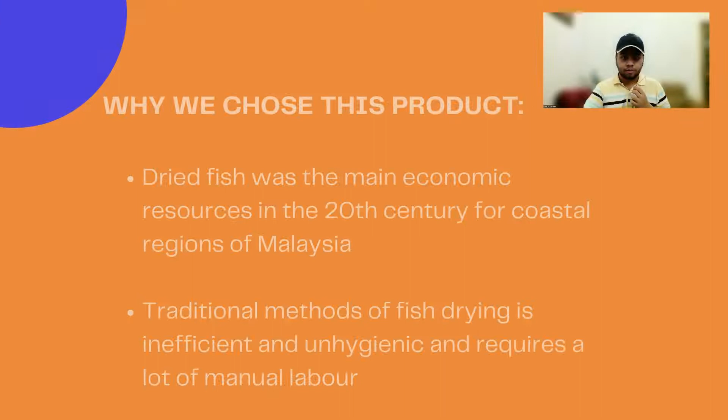The reason for choosing this topic was that back in the 20th century, dried fish products produced in coastal areas of Malaysia had been one of the main economic resources. Even in the 21st century, fisheries and fish processing industries make up a large chunk of the economies of countries like Maldives, Indonesia, Philippines, Bangladesh, Sri Lanka, etc.

Fish drying takes a lot of manual labor, which makes the process very inefficient and unhygienic. This involves a lot of manual labor for little output, and making this process automatic and hands-free for large-scale fishermen would be very beneficial.

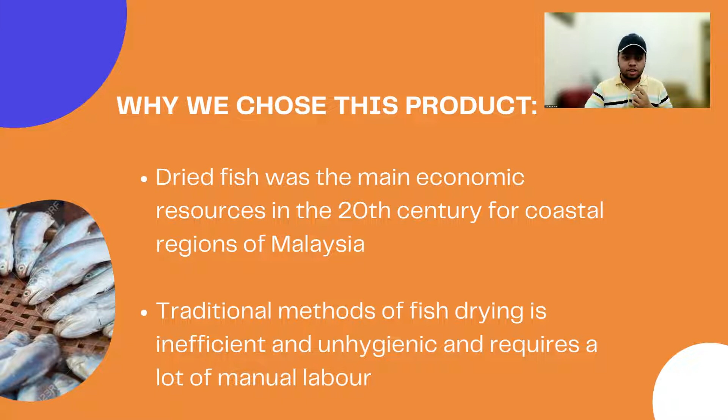So we have designed a hands-free product which reduces the usage of manual input in the fish drying process, while at the same time the design is simple and cheap enough to be operated by ordinary fishermen.

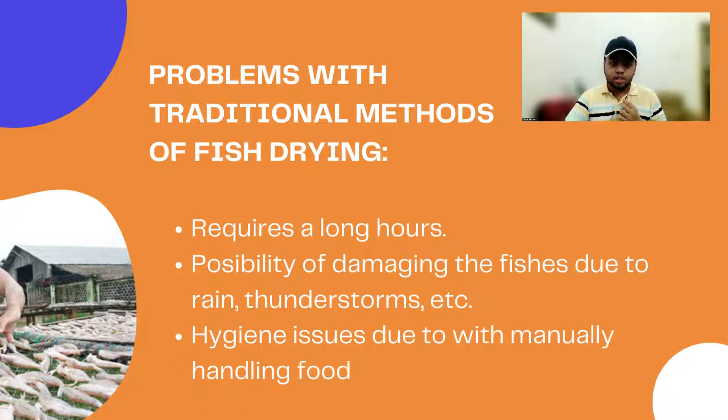In many countries, fishermen that make salted fish need to dry their fish in the sun for long hours. Often there is a sudden change of weather, such as thunderstorms, that can damage the fish, and the fisherman may not have enough time to cover them all, so damage is inevitable. There are also hygiene issues with manually handling food. All of these problems get multiplied in large-scale production facilities.

After hours of discussion and brainstorming, our group has come up with a machine that addresses these issues. The purpose of this machine is to automate the process of drying fish in mass numbers. It aims to reduce the cost of manpower involved, making the process more efficient and hygienic, and reduce the risk of damage from sudden rains or windy weather. Overall, this will automate processes which would normally take fishermen hours of labor, now done by just pressing a button.

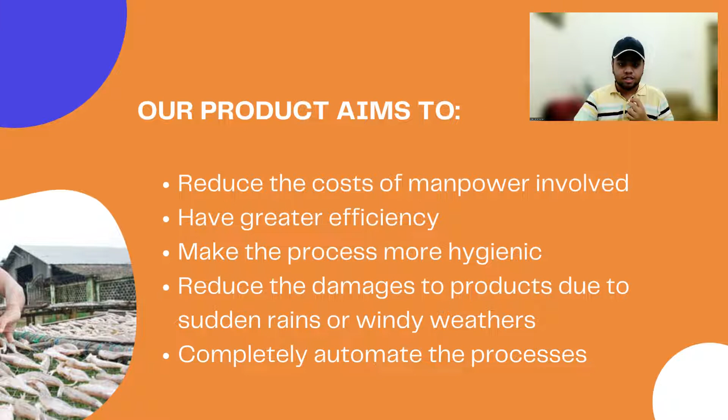So let's talk about objectives and target customers. There are four main objectives of our fish rack: the product should be able to automatically dry the fish without human intervention, salt the fishes, flip the fishes at regular intervals, and retract to shed during unfavorable weather conditions.

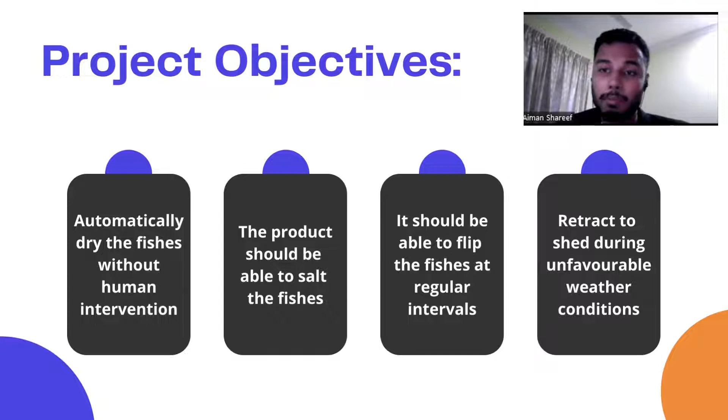As for whom this product is meant for, we are focusing on small and medium enterprises such as small-scale local fisheries and fishermen, as they benefit the most from our product. This is because small-scale fisheries rely on large amounts of manual labor, while large enterprises use industrial dehydrators to dry the fish.

The machine consists of a big rack which can hold the fish to dry in the sunlight. After the set amount of hours required for the fish to dry, it will automatically flip the rack and drop the dried fish into a bucket ready for collection.

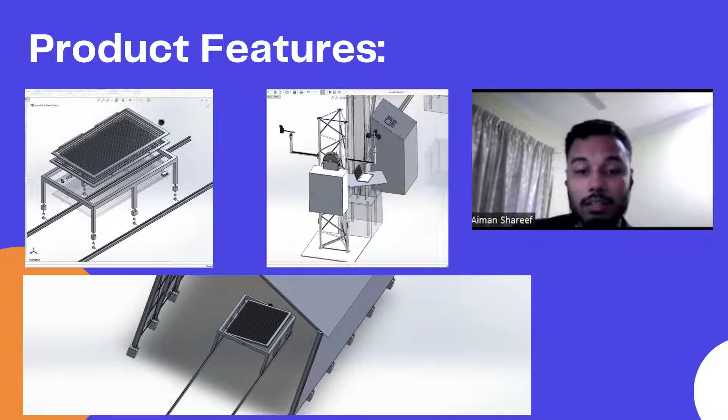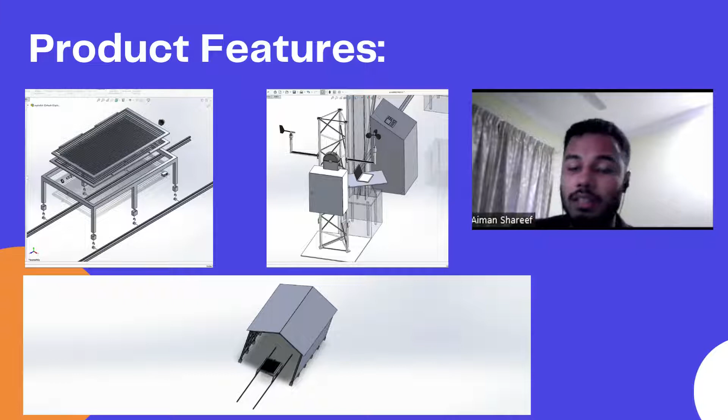The fish drying rack has sensors attached to it, so whenever it detects an increase in humidity or wind speed, it will automatically retract the rack so the fish cannot be damaged or get wet. It also detects sunlight intensity, so whenever it's cloudy or getting darker, it will retract the rack back to the shed.

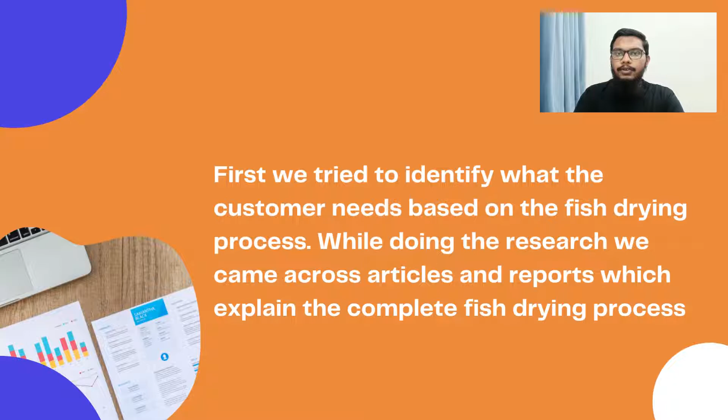First we tried to identify what the customer needs based on the fish drying process. While doing research, we came across articles and reports explaining the complete fish drying process. Based on that, we started by creating a mind map and objective tree where we listed all the features we want in our product.

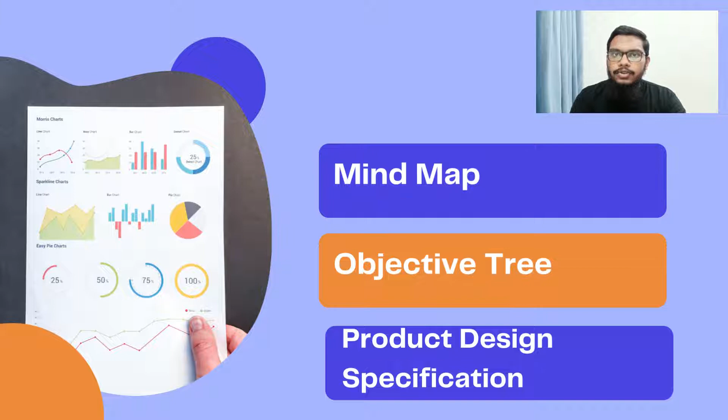Then based on those, we started making our product design specification, which contains all the requirements, constraints and specifications that our product must adhere to.

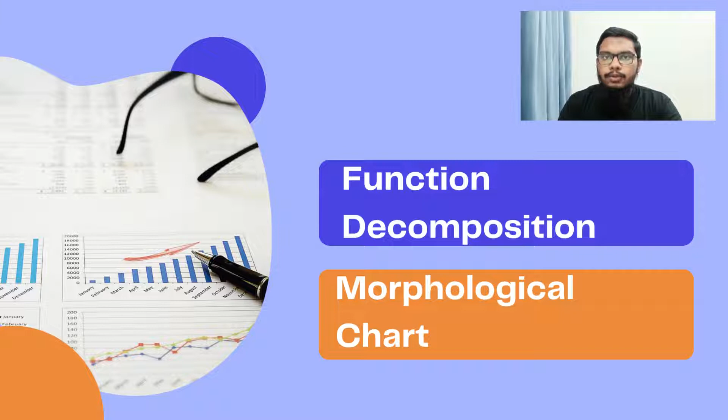After that, we created our function decomposition chart, which breaks down the mechanism of the device into simple steps, followed by a morphological chart, which captures the necessary product specifications and explores alternative means and combinations of achieving that functionality. For each element of product function, we listed down a few different components.

Then based on that, we started brainstorming and creating our own individual concepts, which we evaluated using a Pugh matrix, and based on the result, we started making our final concept sketching.

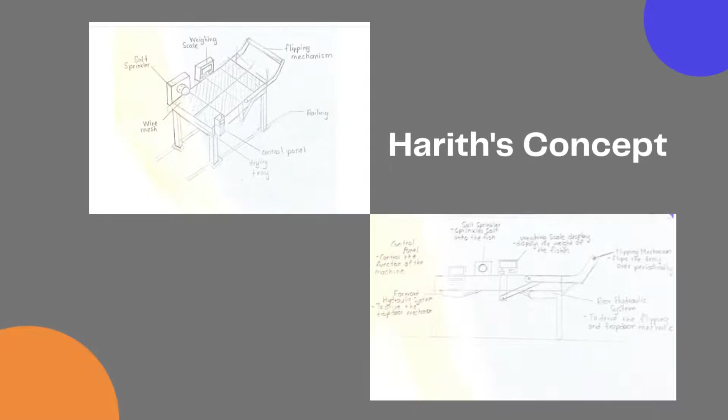These are our individual concepts: this is Harith's concept, this is Yanni's concept, this is Samir's concept, this is Ayman's concept, and this is Ishmam's concept. Our final concept consists of one isometric sketch, one explanatory sketch, and one exploded sketch.

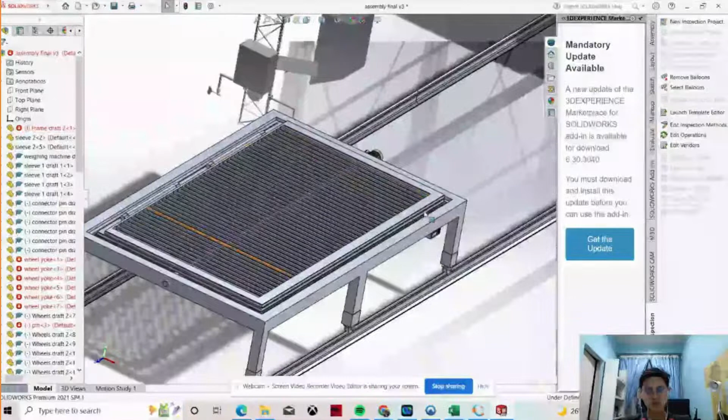Alright, first of all, we are going to look at the 3D model of our automated fish drying rack. This is what the mechanism looks like for the automated fish drying rack.

This is a tray in which the fish are going to be placed. The tray is going to open and the fish is going to be placed here, and then it will be clamped when the cage is closed.

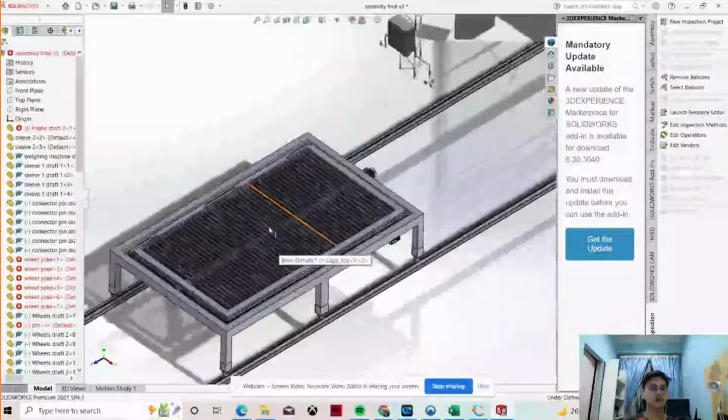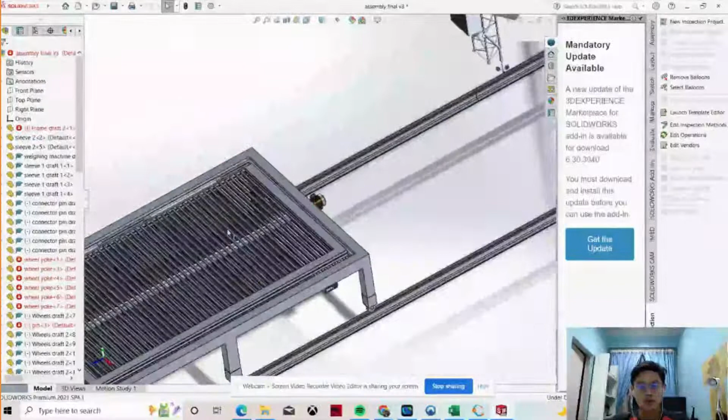When the fish is clamped in between the cage, it will be dried out under the sun, and in a few intervals, every 4 to 6 hours, the user can set the intervals that are needed, and this is the motor responsible for making the tray flip over and over again so that the fish are dried thoroughly.

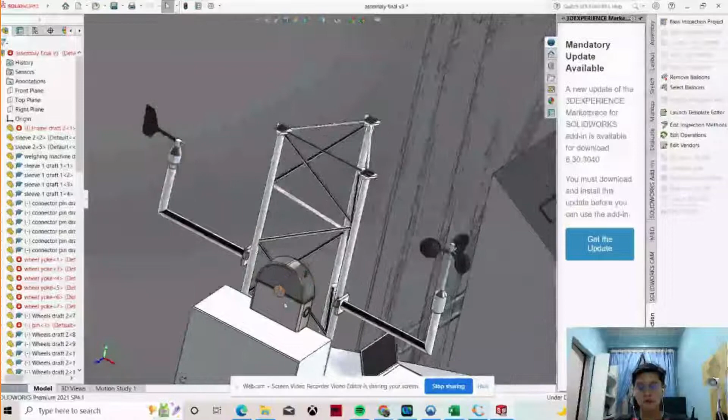This one is the control hub. For this control hub, we can see this is the sensory hub. The sensory hub contains a wind vane, an anemometer, a rain sensor, a thermometer, and a hygrometer to detect any changes in the environment that may hinder the process of drying the fish.

For example, if the day is rainy, the rain sensor will detect the humidity in the air, also the hygrometer, and maybe the speed of the wind measured by the anemometer, and the wind direction measured by the wind vane.

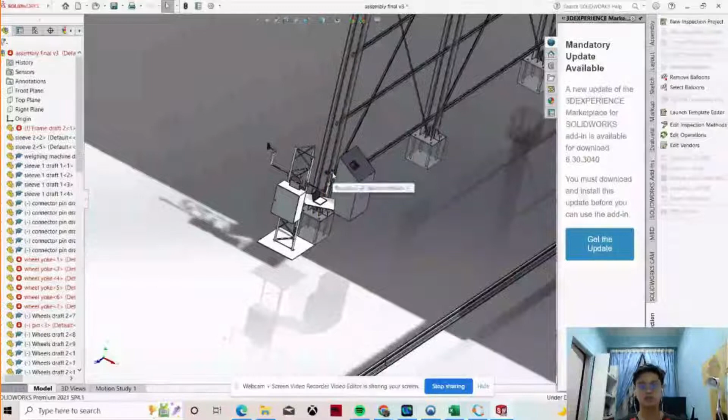It will send a signal to the automated process that we have linked into this laptop, and then the assembly will move inside the shed to prevent the fish from getting wet.

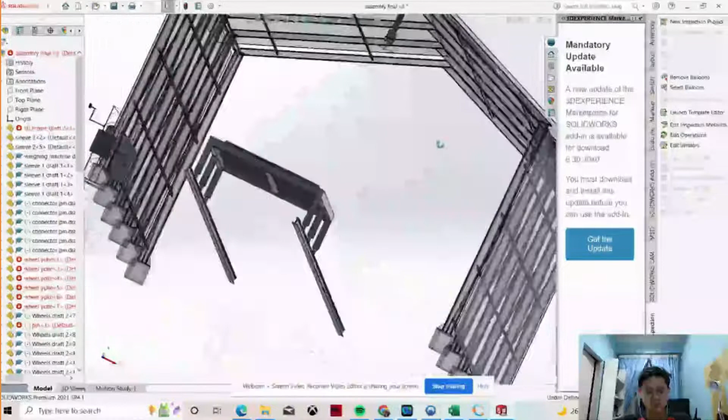Also, as you can see here, this is the salt sprinkler that is responsible to sprinkle salt onto the fish when it is clamped. So next, moving on.

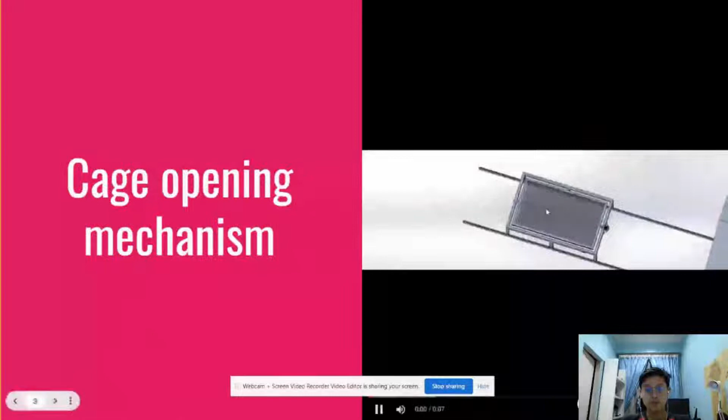So next we are going to look at the cage opening mechanism. This is where the fish will be placed, and when the mechanism opens, the fish can be put into it.

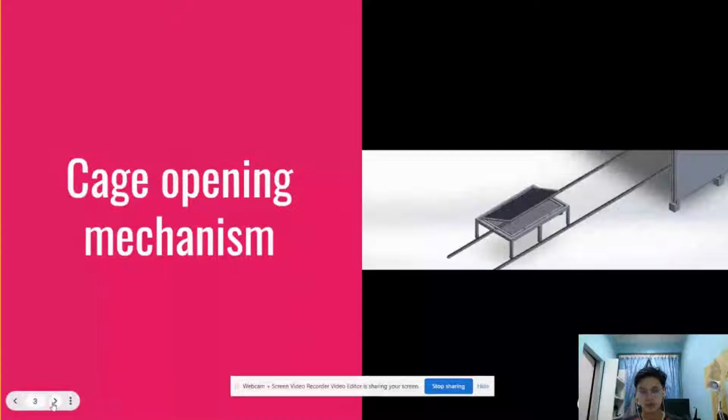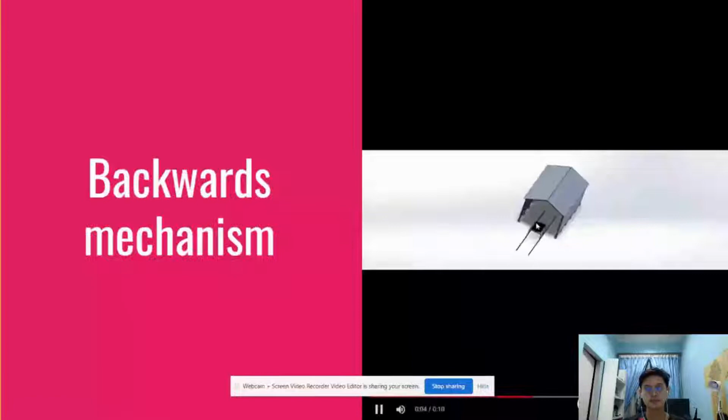Next is the backwards mechanism. This mechanism is crucial as it is used to prevent the fish from getting wet or getting destroyed by unfavorable conditions.

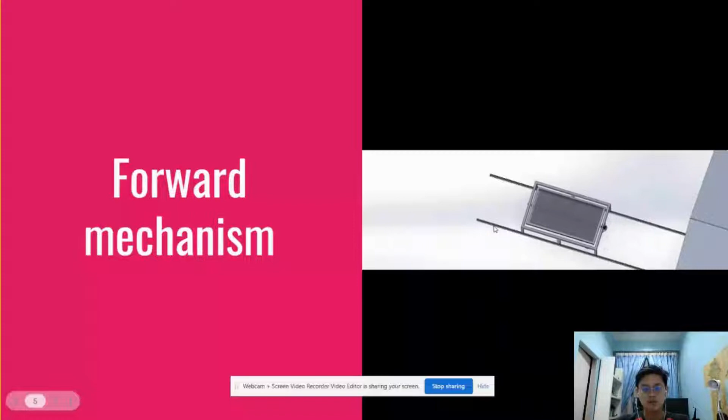And this is the forward mechanism that is used when, let's say, once the rain has stopped or once the wind has stopped blowing in unfavorable conditions, the shed will move back to its original position so that the fish can get enough sunlight to dry.

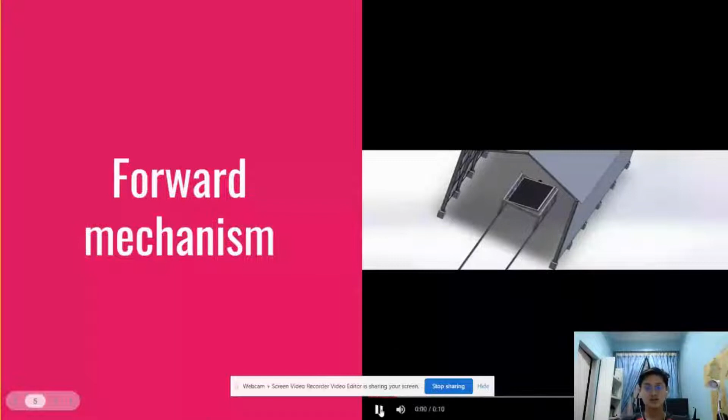Also, it is important to know that the assembly can also detect the weight of the fish, because the amount of water in the fish is responsible for most of the weight of the fish. So in order to know whether the fish has dried depends on the weight of the fish.

It is crucial to know that some fish requires more drying time than others. For example, a halibut may need more time to dry than a sturgeon. So it is important that someone knows what is the needed drying time for each fish.

So next we will look at the KeyShot rendering of the automated fish drying rack. These are the renderings for our automated fish drying rack, where it may be used. It can give you a little hint on what it may look like in real life.

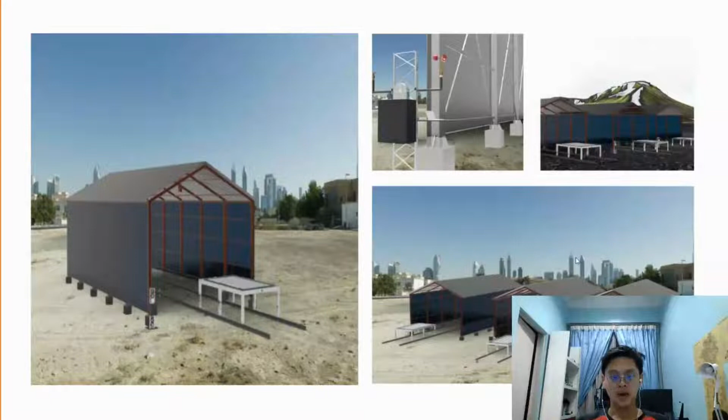It can also be used in other countries that may have unfavorable weather conditions such as snow and anything else. And this is what it also looks like if the automated fish drying rack is used in an industrial setting. So I think that is all from me.

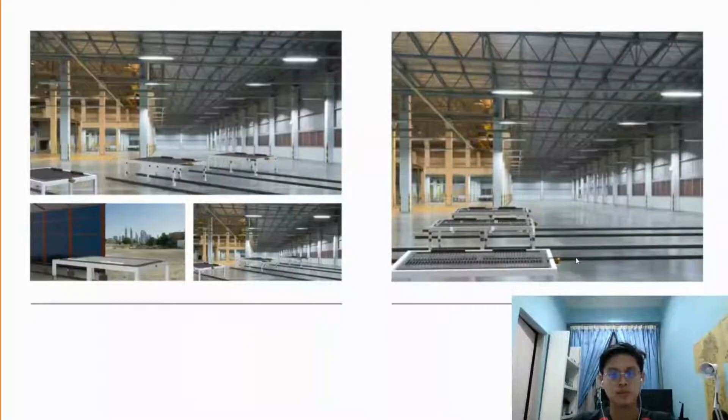So for the final part, let's discuss why you should buy our product. We believe that the automated fish drying rack is the perfect modernization of the process of fish drying. Not only is it automated, but it's also a hands-free device, making it an efficient piece of technology that can do the work of many people just by itself.

Along with this, our product contains a wide variety of sensors that can detect changes in light intensity and wind speed and automatically retract to shelter.

Our product is very simple to use as it has very few operations which require very little technical knowledge. This means our product can be operated by anyone and very limited training is required for it.

Our product has a convenient design and is made with durable and long-lasting materials such as aluminium, steel, and iron, which will require less frequent maintenance and hence will result in a lower maintenance cost.

With this product, we are committing to helping out the small fisheries which use manual labor. The use of manual labor causes the whole process to become costly and inefficient, resulting in smaller profits. Moreover, hygiene is also a big concern since the workers handle the fishes with their bare hands, which can contaminate the fishes, causing the quality of the dried fish to decrease.